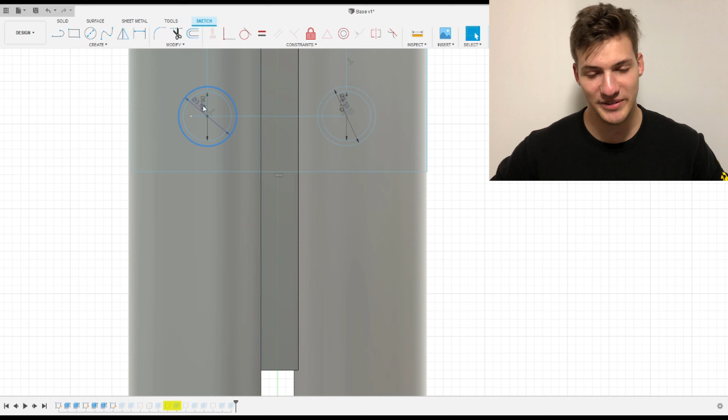Let's get started. What is your plan? My plan is to hopefully get something that actually works. That's pretty much as far as I've got. My plan is to get double the power with double the arms. I'm going to attempt to have 2 strings on my crossbow, and we're going to try to have a trigger mechanism to fire with extreme power and accuracy. I plan to design torsion springs built into the arms that use the tensile strength of the printed plastic as the power behind the bowstring, and they also double as a hinge mechanism for the arms.

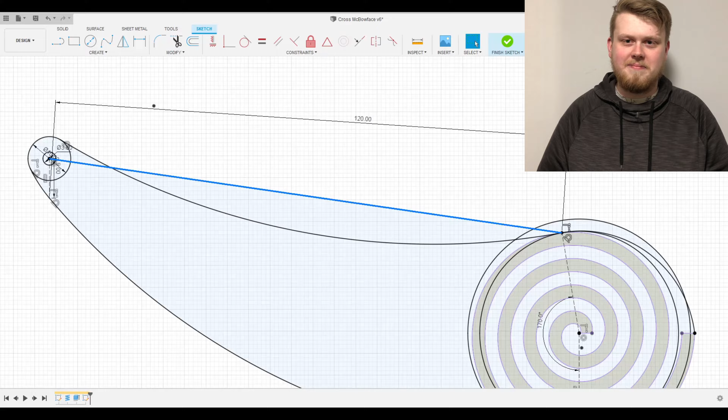We didn't even reveal the names of our crossbows. Oh yes, what are each of you guys naming yours? I already heard my name. What is it? Crossbow 2. Good. Mine is the Texan ex-girlfriend. Mine's Cross McBowface. Dude, I was thinking about that. Beautiful.

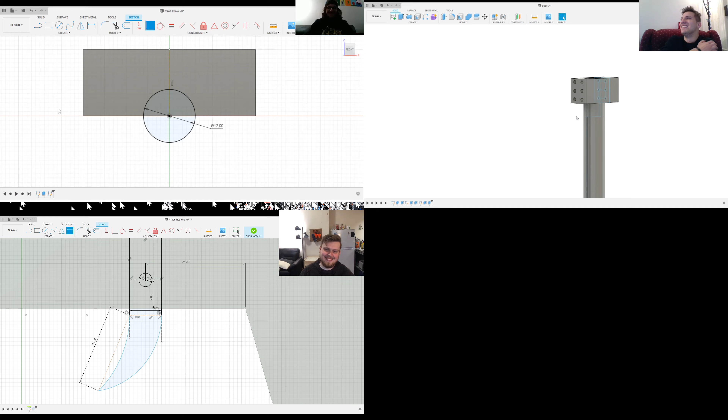Beautifully constrained. Wow, look at you constraining your sketches. Yeah, you're out here using those raw lines. Your viewers are going to be so tilted when they see how little I'm constraining.

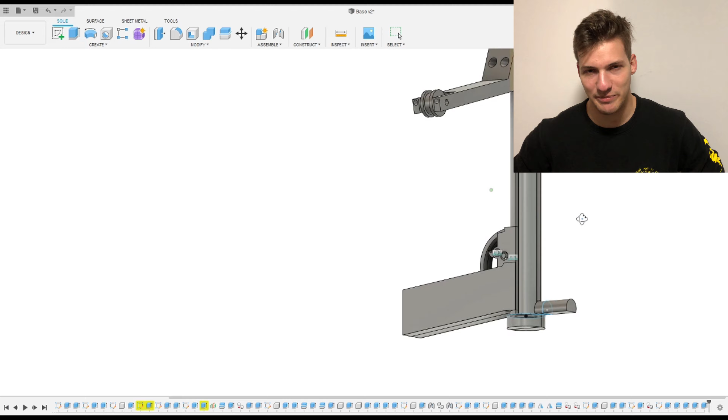What edge do you think you have? I think my laser-like focus and extreme sleep deprivation will give me creative ideas or something. My edge is that I'm not an engineer, so I can think outside of the engineering box. I think that my extreme amount of experience over them will give me an edge over everyone else.

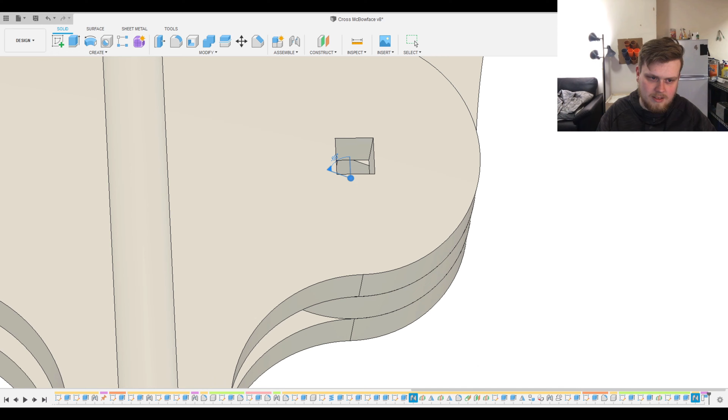Yo, I see nothing wrong with that. That's gonna win you the competition. My favorite part is you have to listen to all of this twice. I know, I can't wait. I'm gonna hire out the editing of this. Oh god, I wish I could afford to hire out the editing of this. Would want to.

How do you feel about your final design? I'm confident that it will shoot a dart. I'm a little worried that it might break down, but overall I'm happy with the aesthetics. I think it looks like a cool-ass handgun. I'm pretty happy with how it came out. A little disappointed that I failed to glue the scope straight, but whatever, that's probably gonna break off anyways. I'm very happy with it. It's going to shoot very far, very fast, and I think I'm going to win.

There will be 3 rounds of judging. They include power, printability, and the final judge's evaluation. Our team of expert judges are here to evaluate the aesthetics, functionality, and printability of each bow. They'll be using a point system to fairly gauge each of our bows, and will have the final say in determining who is the CAD Master.

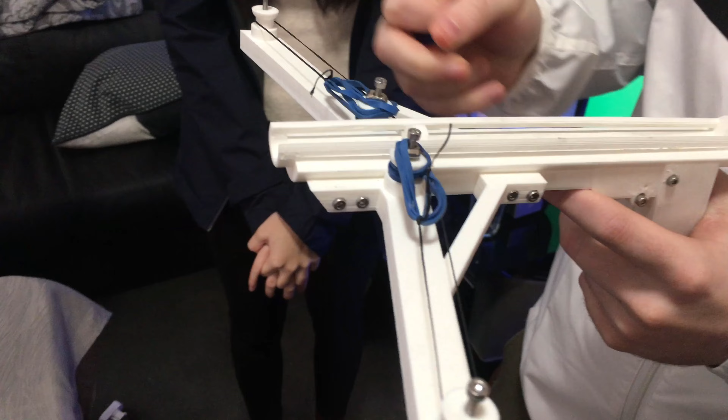Very good, thank you. And then don't put it too far forward, otherwise it'll spin out. So I'd say put it here. That's unintuitive. Yes, docking points, unfortunately. All those points you just won.

Also introduces a lot of variability. The trigger's kind of long, not good for some short-fingered gals. Poor, that was poor. The docking points, poor. I had a terrible user experience.

Alright, have the judges seen what they need to see? I've seen enough. Have you seen it now? Alright, you may confirm if you wish some of your numerical scores.